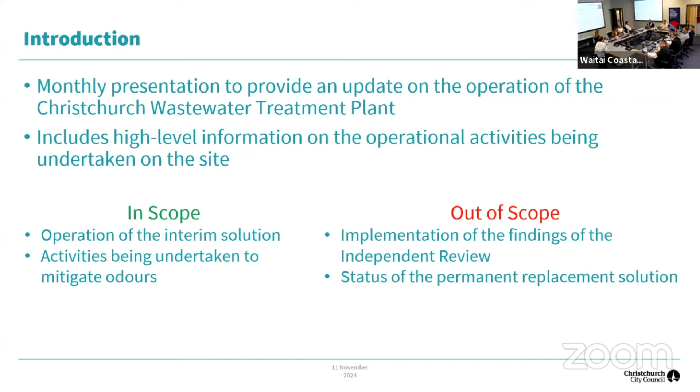So, monthly presentation to provide an update on the operation of the treatment plant, high-level information on the operational activities being undertaken on the site. What's in scope is our operation of the interim solution and activities we're undertaking to mitigate the odours. Out of scope, slight change. Implementation of the findings of the independent review are out of scope. Also out of scope was previously the decision on the assurance. I can now upgrade that to what is out of scope is status of the permanent replacement solution. That's the agenda that I'll be running through.

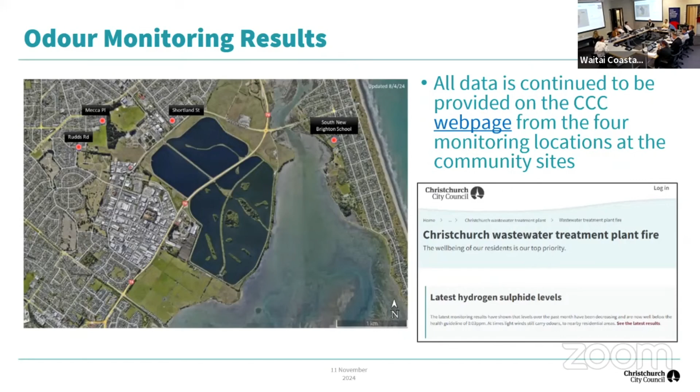So just to reassure yourselves that we are continuing to undertake all the odour monitoring in the community, and all that information is continuing to be provided on the webpage that's up there on the link. However, what is interesting, so you've got two graphs there. These are the 4 community sites. On the left is the results for the last week of September. On the right is for the last week of October. And as you can see, they're starting to pick up low levels of odour.

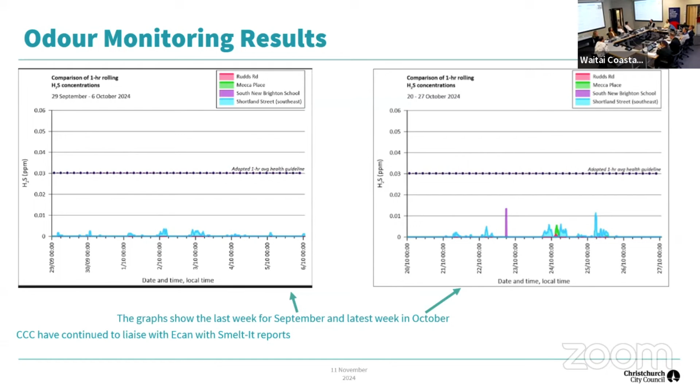So we have recognised that and obviously acknowledged that. And we're continuing to work with ECAN on the Smelt-It reports and have regular meetings with ECAN. And yesterday. Yeah, thank you. So if we go back, you can see there is a slight marginal increase in odour all the way through. What we've seen on site is the site itself has been reasonably stable, and this is sort of a reflection of what happened last year as you moved from winter into summer. So there's nothing significantly changed on site that's resulted in this increase in odours. What we have been doing is we have been preparing the site for summer. We've been looking at everything that's been going on and seeing what we need to do.

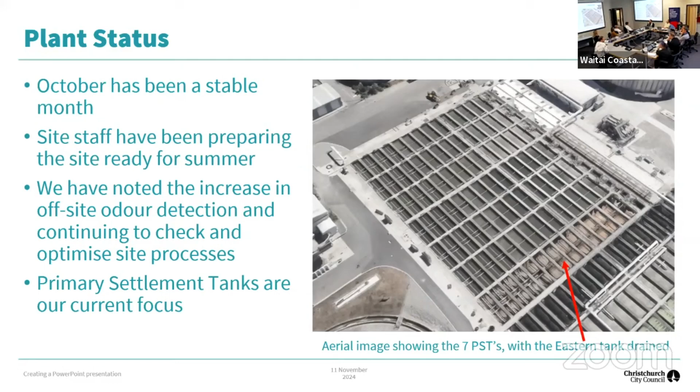What we are focused on is where the odours picked up last year, which is on the primary settlement tanks. So what that picture is showing you there is, if you count them from left to right, there's 7 tanks there. So these are the primary tanks. I'll discuss what they do later in a bit of detail. But as you can see, the bottom tank, that's what a tank looks like when it's empty. So at this moment in time, we've got 6 tanks in service, which just happens to be the same as the aerial image. But what we're going to do is we're going to take one of those primary tanks offline. So instead of having 6 online, we'll go down to 5.

Always trying to look out there for other things that have been going on. So what new technologies are out there. So we've got 2 new monitoring devices that my process engineers behind me have purchased, and they're bringing them into use on site. So one of them is, we go through the ponds every week and we have a look to see what the algae does. We grab a sample, send it into the lab, and a week or so later we get the results through.

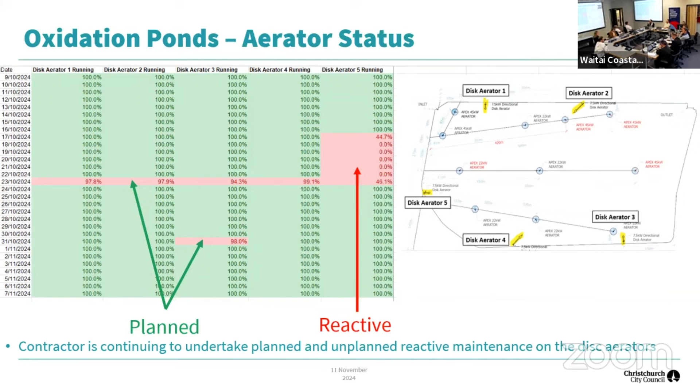So that was when it broke, and they lifted it out, took it away, fixed it, brought it back. They also took the opportunity when they were back on site to undertake planned maintenance on all the other disc aerators on there, to try to make it efficient for them. So that's the disc aerators.

Vertical aerators, as you can see, there was planned activity on the 23rd of October and the 31st of October as well. However, what you can also see is vertical shaft aerator number 5, which is the one closest to the state highway, fell over on the 3rd of November. And I saw them lifting it out today to take away to the workshop to fix.

The reason it's taken so long is they were trying to just change some of the electrical cables on it to see if they could get it to work without sending it away. But obviously, they were taking it away.

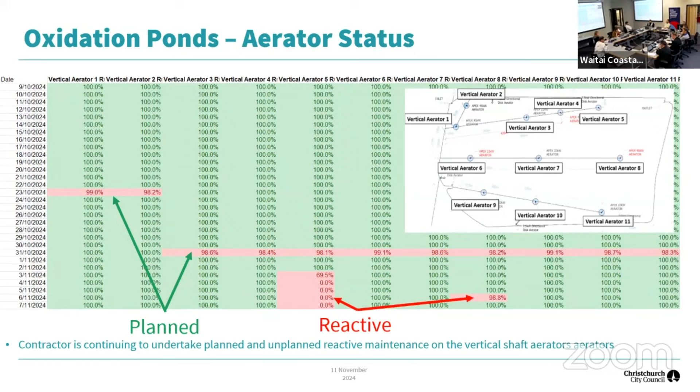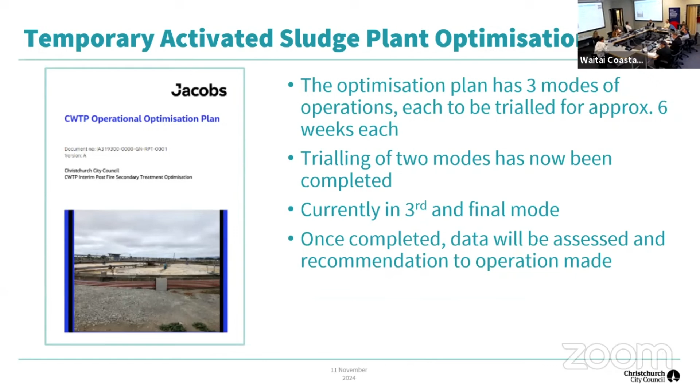The temporary activated sludge plant that we've got, obviously, we're still trying to make sure that's working as hard as it can. So the optimization plan that we're working through with Jacobs has 3 modes for 6 weeks each. 2 of those modes have been completed, and we're on our 3rd and final mode. Once we've undertaken that, we'll have a look at everything and decide what's the best way to try and run the plant.

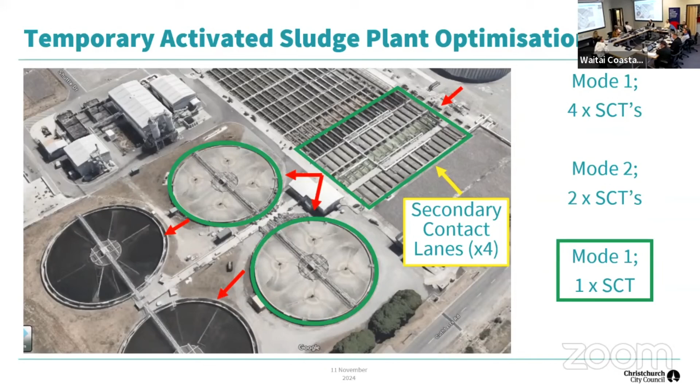So the green box and the 2 green circles show the entire aeration volume we've got on our activated sludge plant. And the yellow box is basically saying what we've been doing. So we've got 4 secondary contact tanks, and we've tried running on 4, then we tried running on 2, and at the moment, so that bottom one should say mode 3, we're running on 1 SCT lane. So we're reducing the amount of volume that the activated sludge plant has got to see if that makes a change, to see if we get it to perform better.

The chemical trials: as you're aware, a number of chemical suppliers came and offered us a number of chemicals that they said would resolve a lot of our odour issues. So we've taken 6 suppliers, 1 of their products each. We've taken it through a number of stages. Step 1, got all the information, so we know that the product is safe and how it works.

Number 2, the small scale trial. We've completed that. Apologies, we got the report after we sent it. Stage 3, we have actually changed it based on the learnings that we got from the small scale trial. The small scale trial was originally just for 2 days, and what we've figured is it's actually probably better to try and replicate the treatment plant the way that it is.

So instead of going up to 1,000 litres and testing it over 2 days, we're going to stay on the small scale of 20 litres, but we're going to run it over a 2-week period to try and better replicate what's on site. And stage 4 is still to go. So 2 products were stopped at stage 1. The suppliers were unable to provide us all the information to undertake the trial.

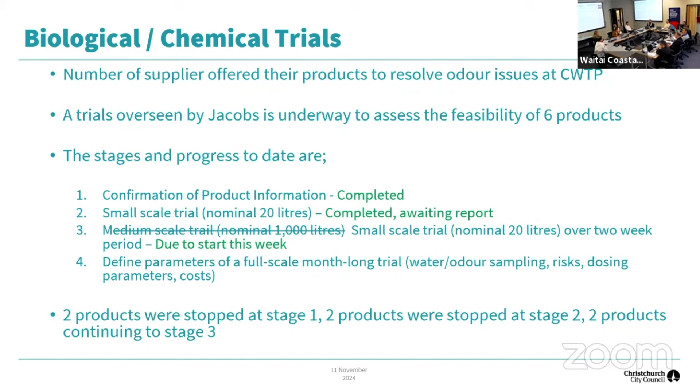So as you're aware, the fire only damaged one section of the treatment plant, which was the secondary treatment stage, which I'll discuss. But most normal treatment plants have the inlet screens, which is the first line across the top, and that takes out gross, as in large, or horrible, inorganic material, anything that people can fit down the toilet: condoms, tampons, cotton buds, wet wipes, anything that's not pee, poo and paper. Why do we take all that stuff out? It's so that we don't block the diffusers and all the pumps downstream.

The primary tanks, which I talked about before, gone from 7 down to 5. That takes a lot of the sludge out of the system, so that reduces the load on the downstream processes. We take it out so more processes don't need to treat it.

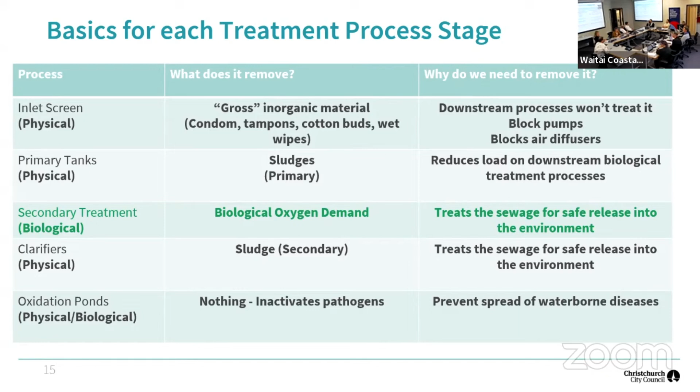The secondary treatment, which is what I'll be focusing on, takes out the biological oxygen demand, which is sort of like the load in the sewage, and it treats it so that it can release it safely into the environment. The clarifiers take the sludge out, again so that the top water is safe for release into the environment, and the oxidation ponds inactivate the pathogens, so it prevents the spread of waterborne diseases.

So the trickling filters and the activated sludge are both secondary treatment processes. The secondary treatment process is a removal of that biodegradable organic material. It's achieved by simply creating an environment for the naturally occurring microbes to thrive and treat the sewage. So we just give it perfect conditions for it to grow and reintroduce sewage into it, and it treats the sewage for us. There's 2 main types of secondary treatment.

There's fixed film or suspended growth systems. Fixed film is where the biomass grows on the media and sewage passes over the surface, like we had on the trickling filters. Suspended growth is where the biomass is kept in suspension in the tanks and then treats it there, goes into other tanks, we settle it out and we take that sludge around and put it to the start of the process. Both of those processes need clarifiers.

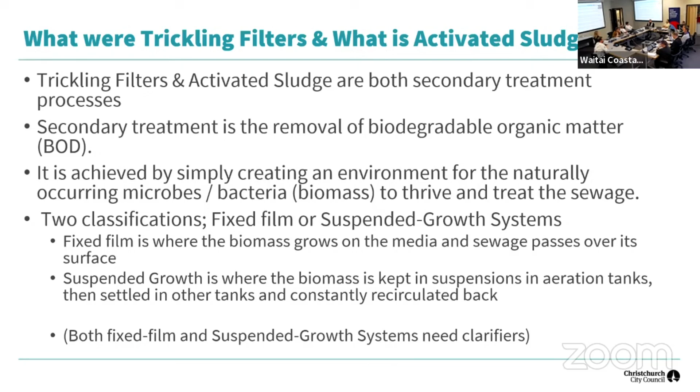So the fixed film one, the trickling filter, is the one that we had on site. If you have a look, the top right is the closest one to it. So if you can imagine that filter 8-9 meters tall, you've got the arms inside and then you have the big dome over the top. So sewage goes up the middle, comes out those arms, works its way through the media with the biomass attached onto the media, and then it comes out the bottom.

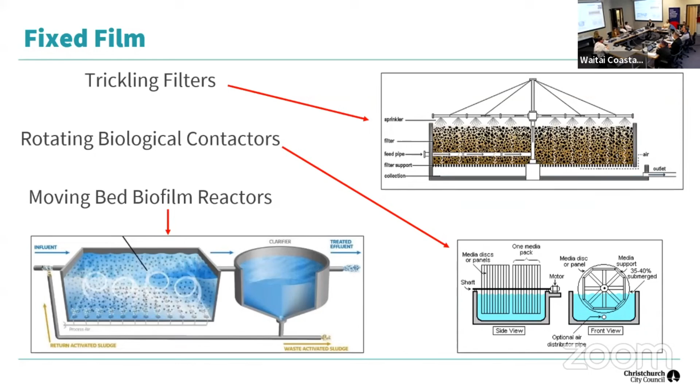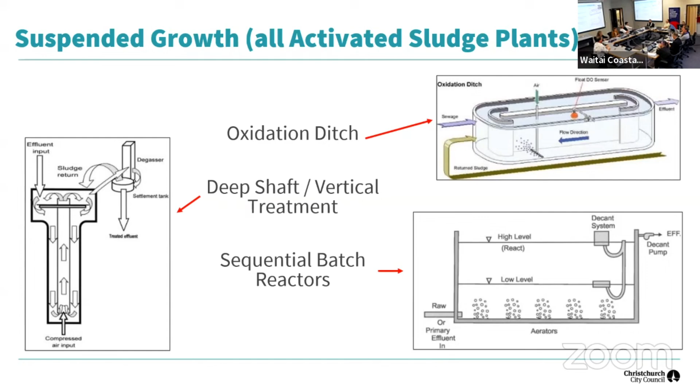Different types of those: you've got rotating biological contactors, which go around in a circle. And then you've also got moving bed biofilm reactors where the mass is on the plastic and it circulates it around in the tank. So those are the fixed film type. The suspended growth is essentially all activated sludge plants, and there's many different types of activated sludge plants out there. There's oxidation ditch, deep shaft, and sequential batch reactors. They all have their small little areas where they work really well: small population, really remote areas, high load areas, but obviously not quite what we've got in Christchurch.

So did you just? He did, yeah, I know. Did you just say to someone else that something is out of scope? Just thought I'd return the favour. Thank you. That's much appreciated. But yeah, given the picture of the big... yeah, so that's good. Yeah.

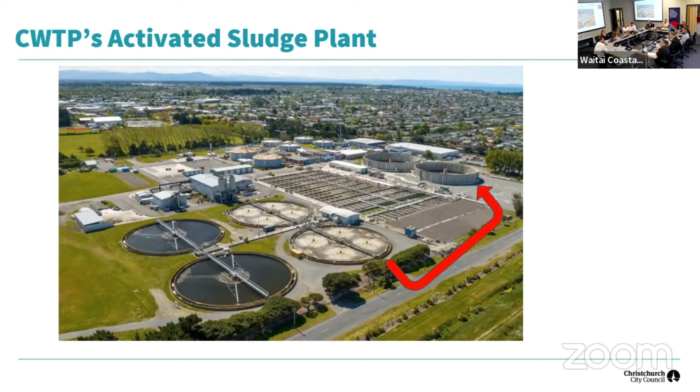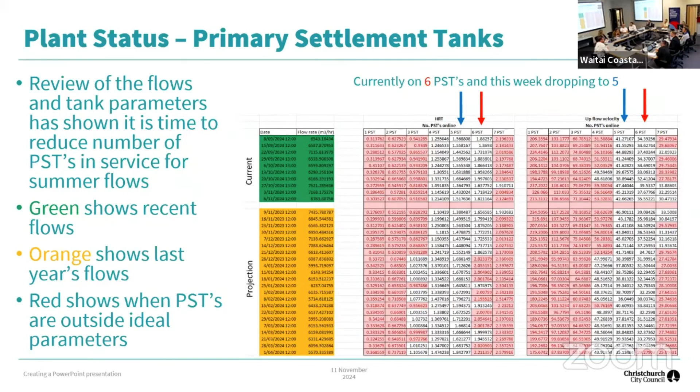It's all information that we collect, and it's everything that we record. There's no reason why we couldn't give it out. It's just, how do you give it meaning to the general public? Like for example, if the algae is light blue, or if it's green, what does that tell us? Yeah, so with the algae, it basically just tells you how green it is. So that's how much algae there is. If there's algae, it produces oxygen. So the more green it is, the better it is for the health.

Yes. Right. So, weekly reading, we've had bright green to, I don't know, clear. So people can see the trend. Poo green, green? It goes up and down in cycles. Typically you see 4 boom and bust cycles of algae over the course of the summer. So I'm more than happy to put the information up. But if we're getting a lot of questions about why is it going down, why is it going up, we can happily provide something on it. But there's hundreds of different parameters.

Yeah, I don't want to take away from that important work that you need to do to do the real-time adjustments to whatever treatment might be causing a problem. But just having a sense of some way in which we can get this new information presented in a way that people can understand. Yeah, we can certainly look at that.

So the chlorophyll a, I much prefer to give the lab data out that we already collect. That goes to the IANZ accredited laboratory. I've got far more faith in that. These handheld meters are just to give an indication. I'm not comfortable putting those results up because I don't know the accuracy of the meter, because I'm still going through that phase. So I'm more than happy to put the IANZ accredited algae up and put a bit of spiel about the handheld meter on it.

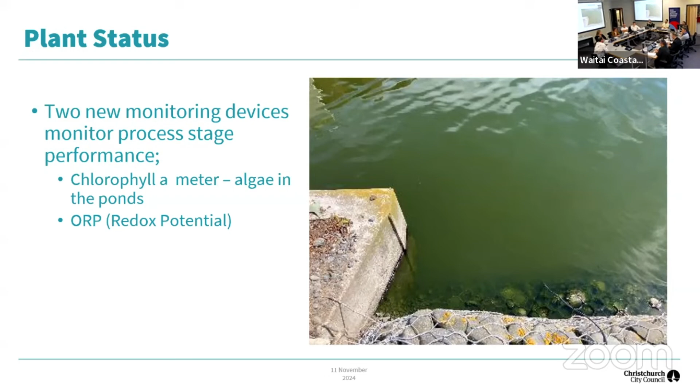Yeah, so just to give an example, that's between the SCT tanks. As you can see, the narrow walkways, we've got handrails in place. It's quite time and people intensive from my side to take tours around. It's certainly something that we could look at, once we get the new plant, maybe. Yes. I was thinking that if people who are making a lot of noise for the right reasons could actually see the complexity themselves, they might go, oh, this is massive, rather than, oh, why is that not fixed?

Yeah, it's something I can look at, but just to give it a little bit of context, the entire site is run by 5 shift engineers on a 24/7, 365 basis. So I've only ever got one at any one time, and they are the only person looking after the entire site. And I've then got my 2 engineers sat behind me, Ramsey and Lenker, and that's it. So during the normal working day, I've only got 2 people on site.

And considering it is running on duct tape and number 8 wire, maybe we'll need to wait for a more permanent solution. We'll take the question away into consideration. I understand the importance of people being able to see it. I just need to manage it. People in high vis would help? High vis doesn't help if anyone touches them.